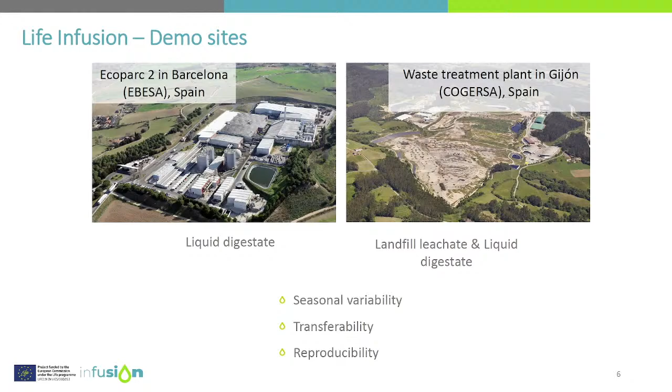Here you have both sites. The first one, Ecoparc 2 in Barcelona. Later, my colleagues will talk a little about the results we have obtained there with liquid digestate. Now we're about to start the piloting in Cogersa, in Gijón, with the landfill leachate.

What we want to see here especially is the seasonal variability of all this process, because of the variability also of what we are getting, the waste. And the transferability, of course, and reproducibility of the solution.

A little bit of the timeline: we started in 2020, first with lab scale optimization of the process, then the adaptation and construction of the pilot plant. We did all the pilot operation in Ecoparc 2 in Barcelona, and demonstration essays with the recovered resources I mentioned before, the biofertilizers and reclaimed water, and also the purge of the bioreactor I will be talking about later. Now we have finalized the pilot installation at the second demo site, and we are starting the operation there.

So here you have a little bit more detail about what we are working on in the project. Here you have a few pictures of all the pilot units.

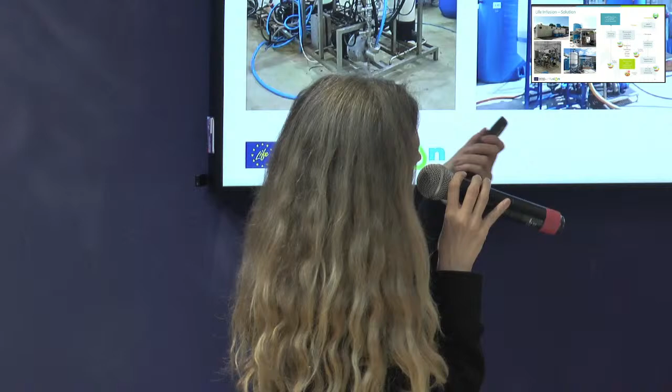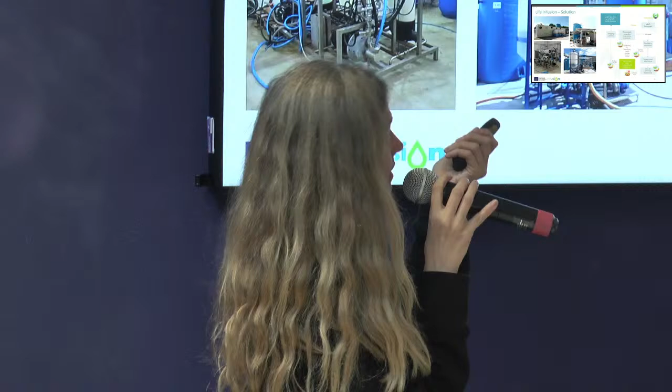What are we doing? This is the main process. We have the leachate or the digestate that I mentioned before. We start with a stripping process to recover some ammonia and also lower the ammonia inside the wastewater to reduce the inhibition in the second step, that is a thermophilic anaerobic membrane bioreactor. In this reactor, we generate biogas, then it's going to be treated with the Abad bioenergy, a technology to upgrade this biogas and produce biomethane.

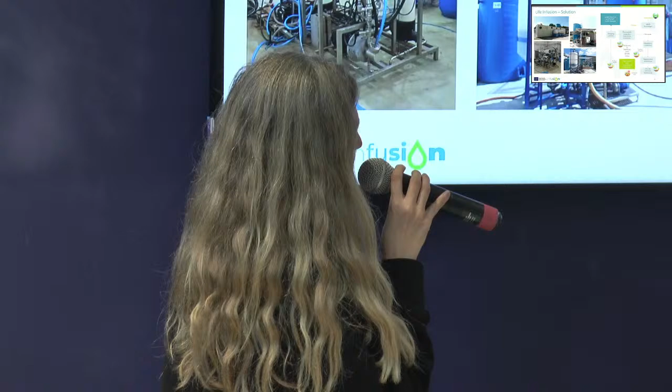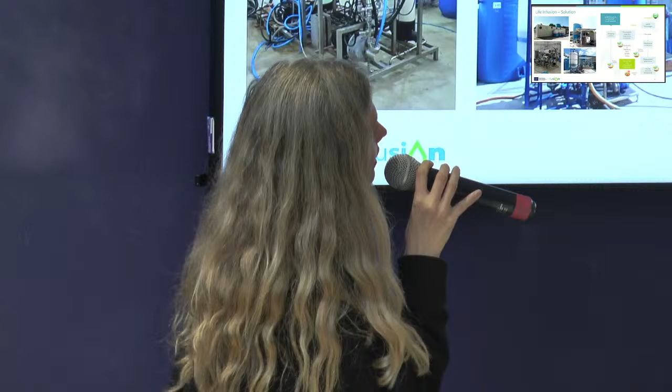And then from the reactor, we get a stabilized purge that can be used as fertilizer, and a permeate from the ultrafiltration membranes. Then we treat it with the membrane contactors to recover the rest of the nitrogen, also as fertilizer, ammonium sulfate. And finally, a step with regenerated reverse osmosis membranes to get really good quality water to be able to use it in agronomical activities.

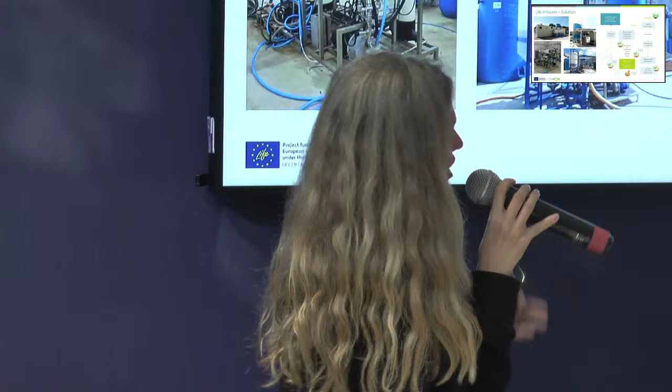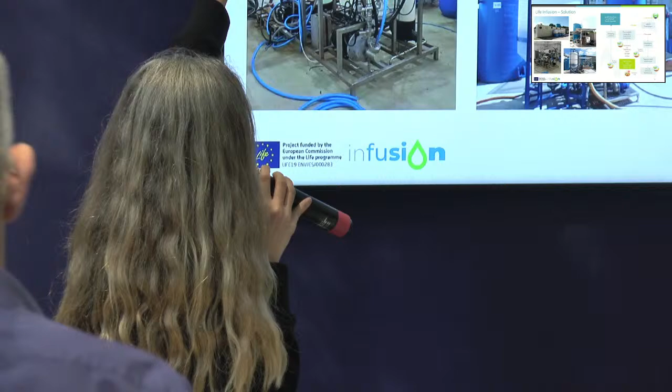So this is the general process we are working on. In here you can see the reactor with the ultrafiltration membranes. This is the stripping unit. Here the reverse osmosis pilot system. And then here a general picture of the membrane contactors. So all these units were first in Barcelona, and now they are installed in Cogersa to start with the second phase of the piloting.

So to end this presentation, a quick review of what Life Infusion is. Just to present to you again the partners. Eurecat, we are coordinating the project, and we did all the lab scale optimization of the process. We have Ecoparc del Besòs, who are doing the first piloting in Barcelona, Cogersa in charge of the second piloting phase in Gijón, Detricon with the stripping technology, Aqualia in charge of all the engineering of the piloting system, IRTA working with the recovered products, seeing how this can be applied, and AMIU Genova and AMB working a lot on dissemination of the results of this project.

So that's it. Thank you for your attention. And I hope you enjoy the following presentations that will be very interesting.

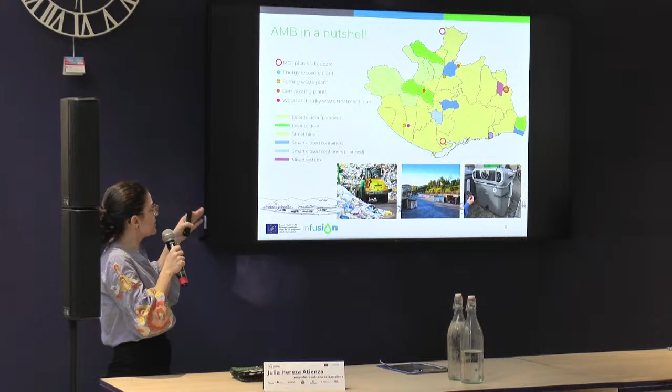As I said before, waste collection is in charge of the municipalities, but the metropolitan area tries to write the roadmap to follow in order to more or less have the same collection system or model. So in our territory, there are different kinds of waste collection systems. We have the more common street bins, but also we have some places with door-to-door collection, and also smart closed bins. But how can we treat or manage all this waste?

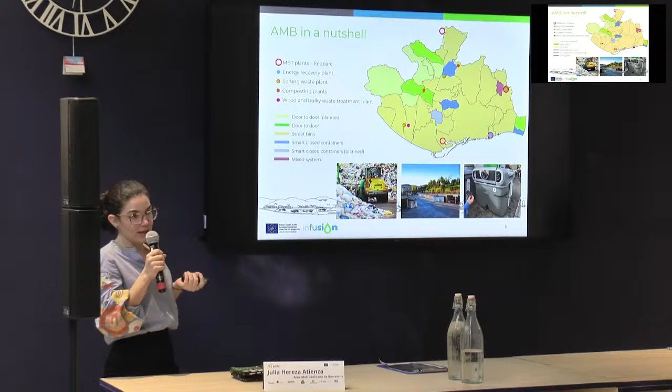So the metropolitan area of Barcelona owns 12 different waste treatment facilities, that includes 4 MBT plants, 4 biological treatment plants that we call ecoparcs. Also, there's 1 energy recovering plant, 3 sorting plants, 2 composting plants, and 1 wood and bulky waste treatment plant.

Moreover, we have also a transfer plant in order to minimize the impact on the environment related to transport, and also to optimize the logistics.

So why we are involved in this project? The metropolitan area of Barcelona, we try always to reduce. Our purpose has always been to reduce all the rejections that we have in our treatment plants, and try to close the loop between waste and resources. That's why we are constantly searching for innovative solutions and systems to try to reduce this rejection. And it is, in fact, in the liquid fraction of the digestion that we find a very nice source of resources.

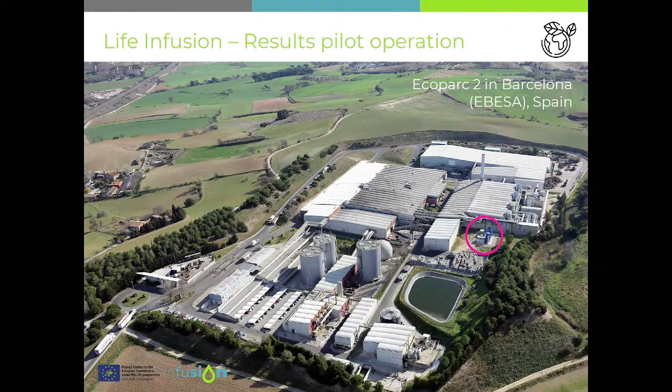So as Caroline said just before, let's go deeper into the results obtained in this first demo site in Ecoparc 2 in Barcelona. There is an aerial picture of this MBT plant, and in the pink circle you can see the pilot plant, the Life Infusion pilot plant. As you can see, it's quite big - a semi-industrial pilot plant.

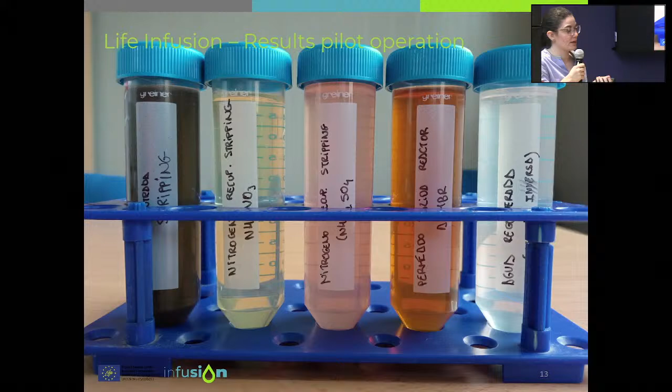So in this system, we start from this effluent that is dense and looks like chocolate. It has a very high concentration of organic matter. And from this effluent, we go to very clear water that can be applied into agriculture and aquaculture.

So going deeper into the results in each part of the process that Caroline mentioned before, we start with the stripping and scrubber unit. Here we tested the system with different temperatures in order to see how temperature impacts nitrogen recovery and removal. We have seen that at temperatures above 45 degrees, we achieve the KPI expected in the project, which is to remove or recover at least more than 50%.

In the anaerobic membrane bioreactor, we also tested using different organic loading rates. We have seen that the higher the organic loading rate, the better the system works, and more chemical oxygen demand can be removed from the effluent.

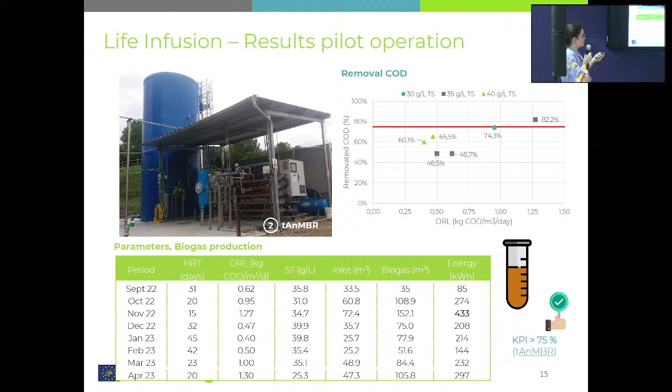Also, there is some relation related to hydraulic retention time and the biogas produced - we can increase biogas production, getting more or less between 1.2 and 3 cubic meters of biogas per cubic meter of wastewater treated.

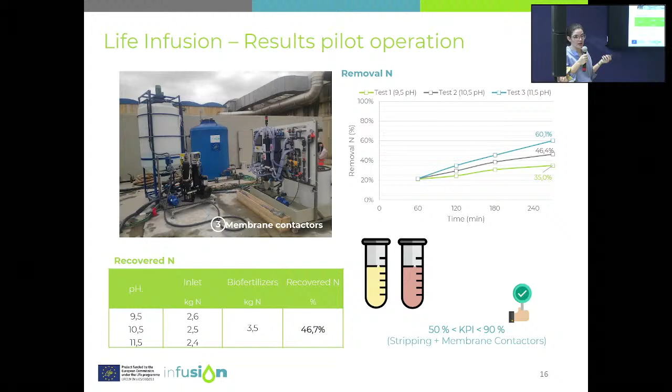So related to the membrane contactors, although this step of the system won't be possible to operate during a long period of time, we have seen that the more basic the pH, the better the system works, and it would be more possible to recover a higher amount of nitrogen.

But in the last step of the process, there's a reverse osmosis membrane where we saw that the more acid the pH, the better the system works. So here there's a conflict - we have to play with the pH, because in one step we need a very basic pH, and in the other the optimal is more acid.

So we are studying the possibility to change and use a stripping and scrubber unit just before the anaerobic membrane bioreactor instead of the membrane contactors.

So in conclusion, around 1.5 million tons of municipal waste is generated in the metropolitan area of Barcelona, and we have to do something to try to reduce the amount of rejections in our MBT plants. The Life Infusion solution tested at Ecoparc 2 allows us to increase the energy obtained, produce different kinds of nutrients and reclaimed water, and the positive results obtained during the project have motivated us to include this solution at a larger scale in our waste treatment plants in the future.

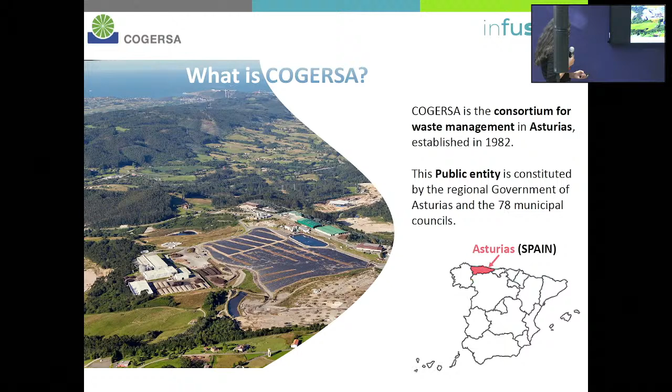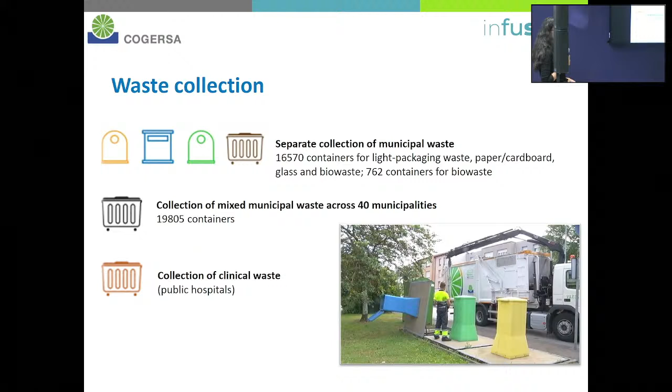The consortium owns the company with the same name, which is a public company that handles the waste operations. We also carry out some of the activities for waste collection, and we differentiate between the types of waste using different colors for our containers.

840,000 tons of waste. Almost half of it is municipal waste, and the next biggest amounts are construction and demolition waste, around 20%, and industrial waste, around 16%. But we also handle waste from hospitals, clinical waste, sewage sludge, and much more.

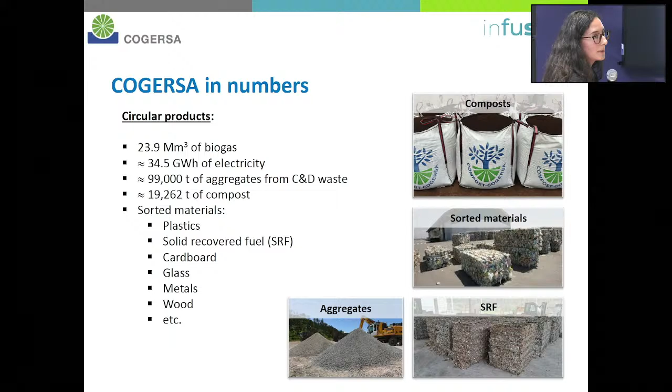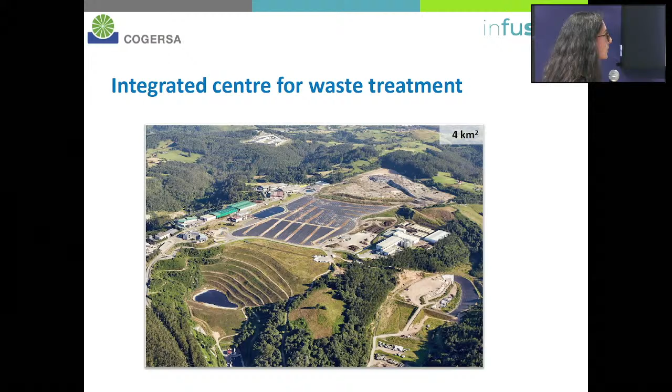We do all of this in an integrated waste treatment center of around 4 square kilometers. Inside, we have 5 sorting plants: one is an MBT plant, the mechanical biological treatment; another for light packaging waste; another for paper and cardboard waste; construction and demolition waste; and waste from electrical and electronic equipment.

We have one anaerobic digestion plant in which we treat the organic matter that is collected through separation at origin. Here we produce biogas, as I said before, and digestate, and this digestate is used also in a compost process. We obtain compost from green waste and manure and from sewage sludge.

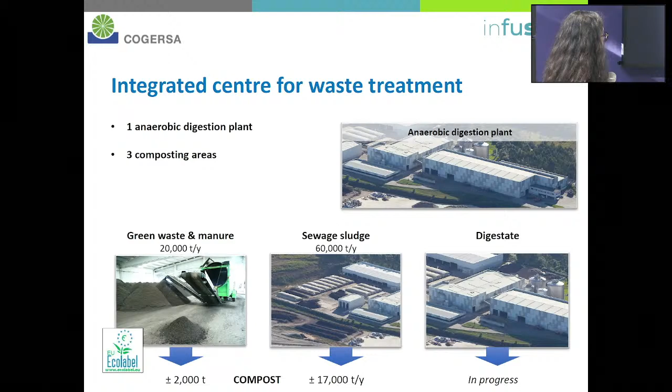We have 3 landfills: one for hazardous waste, another for non-hazardous waste, and the last one for inert waste. We also have one waste-to-energy plant in which we treat mainly the clinical waste, waste from public hospitals mainly.

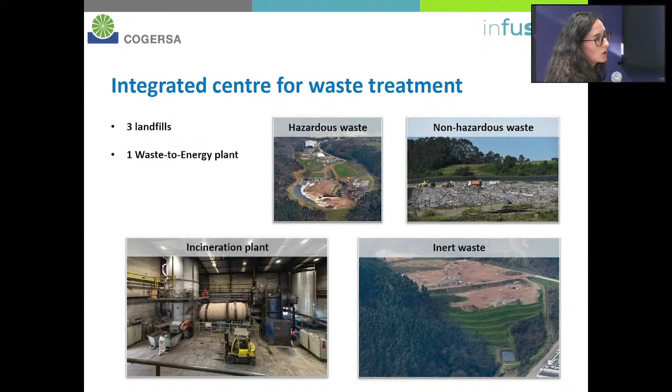We have 4 plants to treat hazardous waste that include physicochemical treatment, solidification and stabilization processes, treatment of mineral oils, and recovery of synthetic oils. And finally, there are other facilities, such as an area for bulky waste or one facility for animal byproducts.

We also have 2 depuration plants for wastewater, a biogas grid, and also a laboratory and an area destined for R&D projects that we call Open Lab.

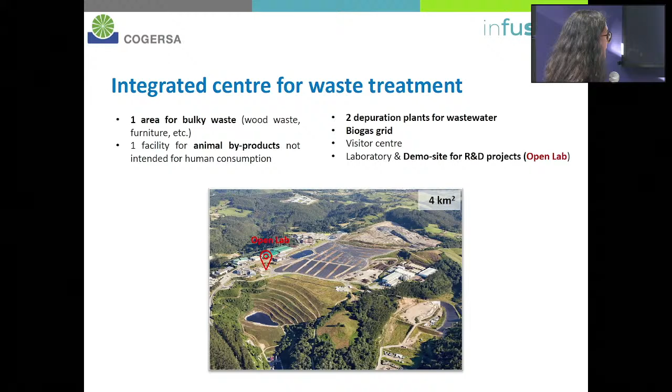The Open Lab, as you can see on the screen, is quite close to the offices, between the offices and the landfill. This is a satellite view of the Open Lab, just to show you that we are creating this space thanks to co-funded projects, and it's also under development.

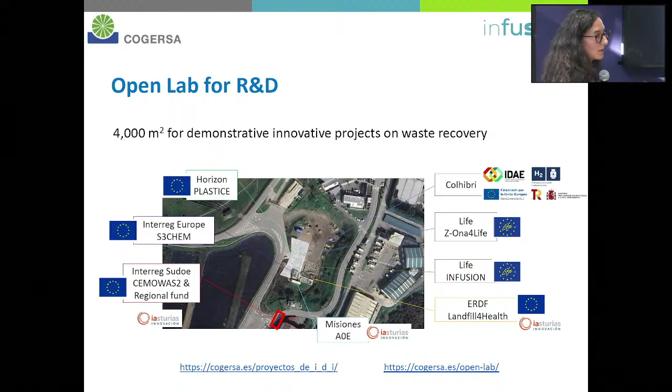One of these projects, of course, is the Life Infusion project that my colleagues have also talked about. The idea is to give intensive treatment to wastewater in order to obtain biomethane, biofertilizers, reclaimed water, and microalgae.

We also have other projects that will allow us to use aluminum salt slag, for instance, to obtain zeolites that can be used for wastewater treatment.

Also, we are involved in another project, a Horizon one, about chemical recycling, in which we are going to use HTL technology, which is hydrothermal liquefaction, to obtain oil from plastic waste. And there are many others, as you can see, because we obtain funding from regional, national, and European projects.

So this is the view, a photograph of the Life Infusion plant, the one that was previously in Eco Park, and that we have nowadays in our center.

Some of this equipment was already tested in Barcelona, such as the anaerobic digestion digester, the ultrafiltration, the membrane contactor, and the stripping unit.

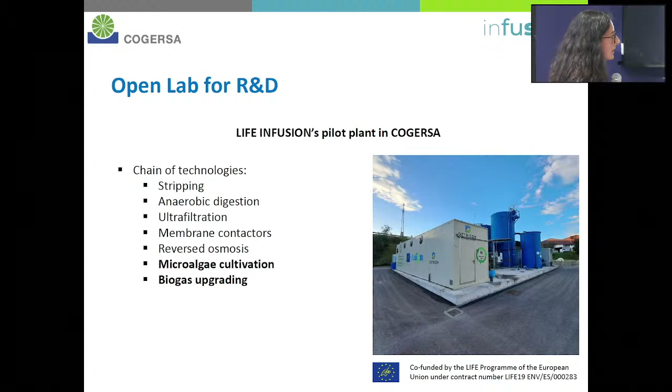But we want to integrate into this chain of technologies the microalgae cultivation plant that we already have in our Open Lab, and also a biogas upgrading unit that is developed by Aqualia.

So the idea is to start treating leachate that we generate in our non-hazardous landfill. And afterwards, we are going to treat the liquid fraction of the digestate, the same that was done already in Barcelona.

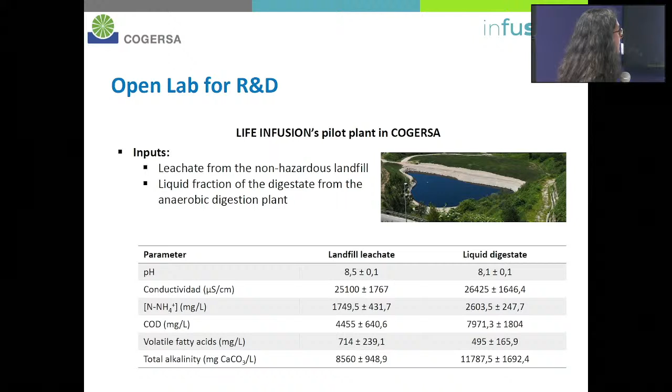So the idea is to obtain different outputs: biofertilizers, in this case ammonium sulfate, biomethane by upgrading the biogas that we obtain, also reclaimed water, and microalgae biomass. This microalgae biomass will be obtained in our microalgae cultivation plant that you can see in this photograph. We are going to use the nutrients present in the wastewater, nitrogen and phosphorus, to grow this microalgae, and also the CO2 produced in the emissions from the incineration plant.

So this is a timeline. We expect to start the plant in a few weeks, hopefully with good results and fast. The idea is to start using the leachate and afterwards the digestate. We have carried out different studies at the university to support this initial operation of the plant. In parallel, we will grow the microalgae, and we are going to study how the consumption of this microalgae will evolve as we change the feedstock.

We are also going to study the compostability of the digestate that we produce, and we are going to carry out some biofertilization assays in another project called NutriGest, focused on the Eucalyptus globulus in Asturias, a tree I'm sure you all know.

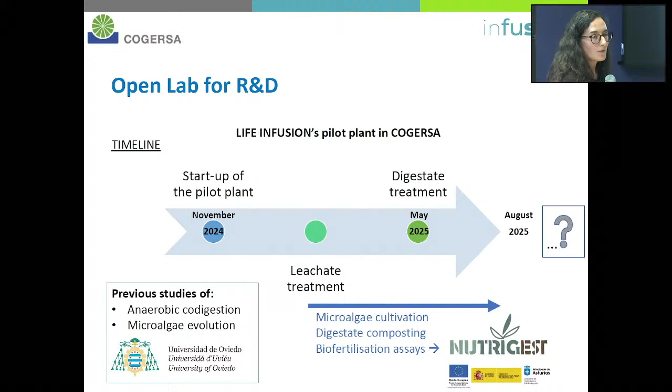We are starting even to include the plant in new proposals. For instance, last September we sent a proposal, a Life proposal, in which we include the use of this plant, for sure, in a different context and with different objectives. But in the end, that's the idea that we have for the Open Lab: to have an open innovation space in which we can try different technologies to valorize our waste, our effluents, and contribute to walking towards a more circular economy.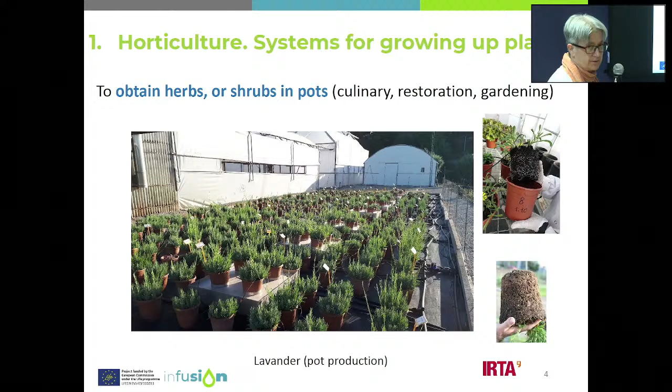So it's quite evident the origin of water for horticulture and agriculture is groundwater and also surface water from rivers. And for fertilizers, normally there's still a massive use of synthetic fertilizers that are chemicals, so we need energy and resources to produce them.

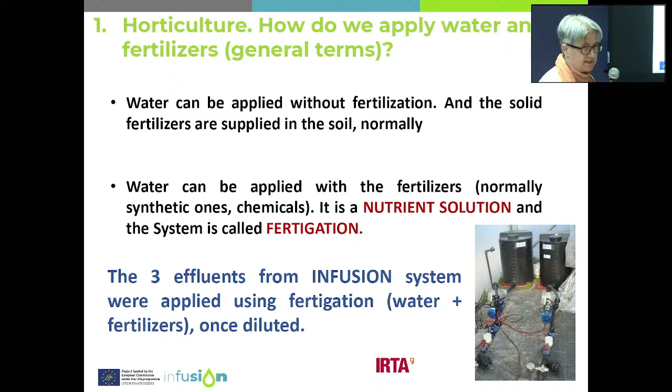How do we apply these inputs? Water can be applied without fertilization, and then the solids, the fertilizers, are applied into the soil. But also water can be applied with the fertilizers, meaning we manufacture a nutrient solution, and the system to apply this nutrient solution is called fertigation. So the effluents get into the infusion system and we apply it as a fertigation system, applying both water and fertilizers.

So there is a very important challenge: the replacement of synthetic chemical fertilizers with byproducts, for the reasons I told you before. Another issue is water scarcity in our Mediterranean region, particularly in Catalonia. We had like 4 or 5 years of deep drought.

So the objective here of IRTA in this project was mainly to conduct experiments to test new circular horticultural systems using effluents from the infusion systems as a nutrient solution.

So what is actually a nutrient solution? We need to manufacture it with water. We should dilute nitrogen into forms of nitrate and ammonium, and also add potassium, phosphorus, and calcium. Normally these are already present in our waters. And we want water low in sodium and chloride.

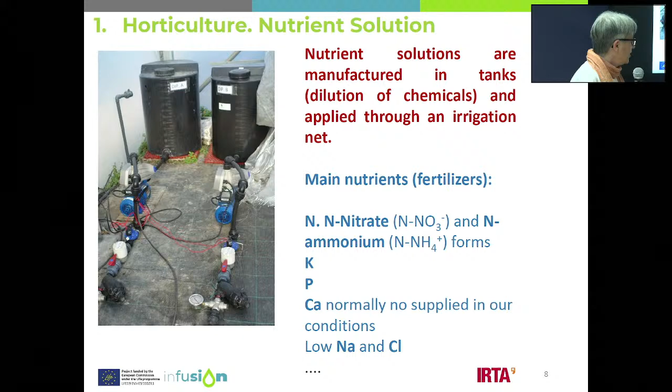Of course, the well water, the original water in which we dilute the nutrients, is normally very low in nutrients, and this is the reason why we add chemicals to increase the proportion of these nutrients.

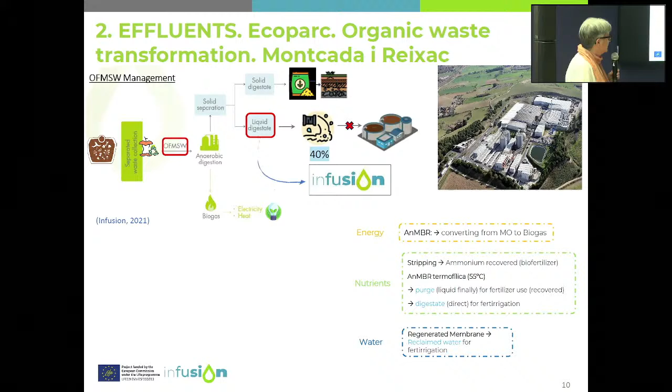So this is the scheme we have been discussing in other presentations, and we try to use basically 3 effluents from the system. The first is the digestate that comes from the bioreactor. The second is a concentrate, also called purge, from ultrafiltration. And the third is the reclaimed water obtained after several processes, including ultrafiltration and reverse osmosis.

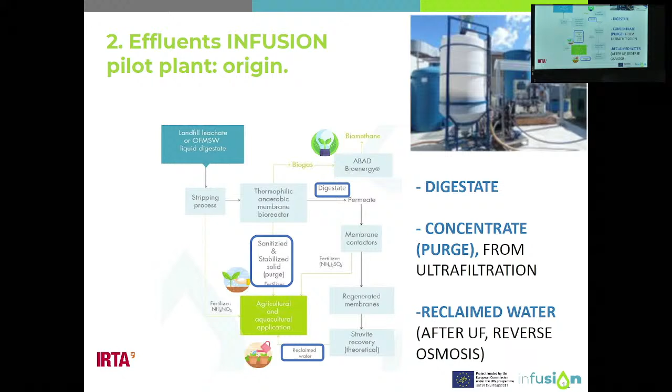So we are going to focus on the agronomic use of these 3 products. What should we do if we want to use such products, such effluents? First, we have to characterize the product's composition. Then check the feasibility of direct use, if possible. It's not easy, but it can be possible.

Then, if needed, we have to adapt the composition of this solution to the nutrient solution needed. Another possibility, not excluded from the others, is to use selected plants that can be more tolerant, for example, to some parameters.

What kind of situations can occur? First, as in this case with life infusion effluents, we can find high salinity in our effluents. In this case we have to dilute with well or surface water. We can also have an inappropriate pH—normally these products have a high pH, so we have to add an acid.

Another option is to add nutrients to the effluents if needed. And the last option I mention here is to limit the use of the solution if it is too concentrated.

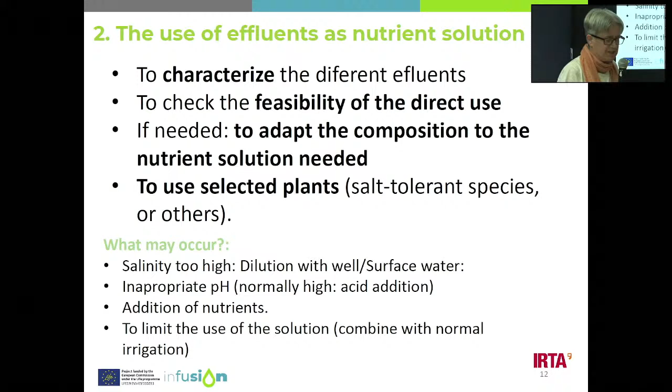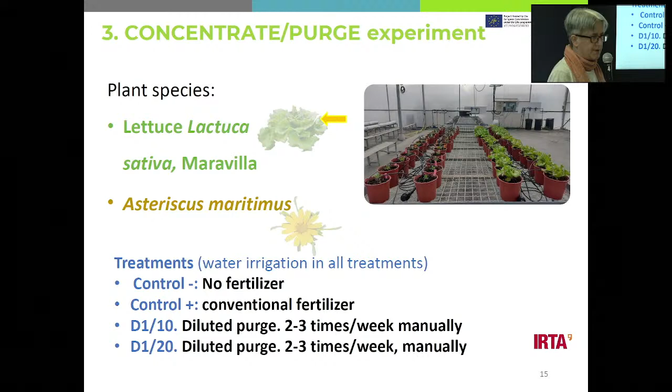In addition, when we manufactured these dilutions, we kept the products in a refrigerator because we wanted to avoid other processes inside the products, for example nitrification - we wanted to keep the liquids in good conditions.

And we measured, during the whole period of growing the plants, different key parameters: pH, EC, nitrates, and ammonium.

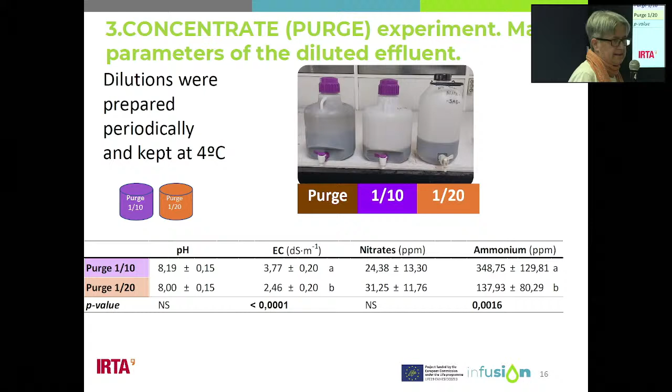You've noticed that we have not added acid to the solution - instead the pH is high. Normally plants want a pH like 6.5, more or less. This is because we expect that the substrates can make a certain lowering of this pH.

A buffering effect also. This is a view of the experiment with 4 treatments. Remember that the application was manual, and not every time we were watering was it applied - we added just water in some irrigation events.

And we are going to see just the results for lettuce, a short view. We achieved, of course, that if we have a control negative, the plants really don't grow, because we chose a substrate with low fertility, meaning plants don't have any nutrients for growing. So we have a very low growth of the plants - this was for checking that we were using an appropriate substrate.

Then you can see that control positive grew more than the other treatments, our diluted effluent treatments. And for Asteriscus, the other species, we had better results with the more concentrated solution. So we concluded that there was still room for applying more product.

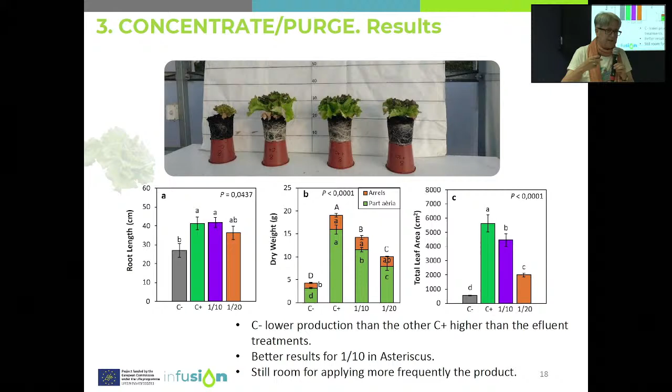This is the reason why we scheduled another experiment. If you remember, the composition of the digestate and the concentrate was quite similar in general terms. So we had digestate available for doing the experiments, and we made two more experiments, for lettuce and for another ornamental species, Limoniastrum monopetalum.

Again, the kind of experiment was the same: control negative, control positive. Then we applied a solution with digestate at 150 ppm of ammonium, and another one with half of this concentration. In this case, the product was kept inside the greenhouse, so we didn't keep it in a refrigerator - it was in normal field conditions. And we applied the products continuously, so with the irrigation network, this product was applied all the time.

In a second experiment, we checked double the concentration. This table shows the concentration, the properties, in the 2 trials of the different solutions - just remember that we were working in real conditions.

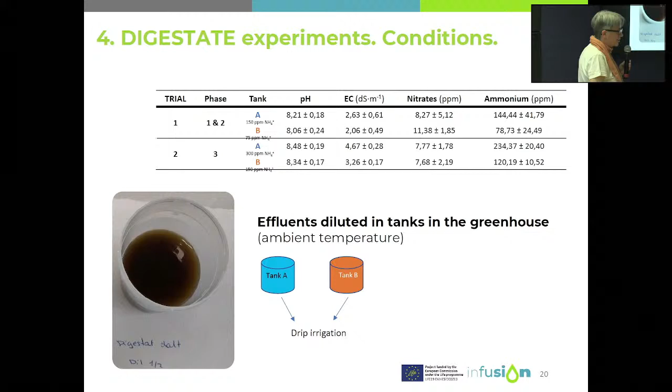This is a view of this second experiment with digestate, which comprises two different experiments, particularly with lettuce. And these are the results in this case: in the first trial, we achieved equal growth between the control positive and our treatments.

This was achieved, but the results were quite low. In the second one, where we increased the concentration of ammonia, we achieved higher performance, higher growth of the lettuce, and it was clearly different from the negative control. So we found that we had a positive response when ammonium concentration was increased.

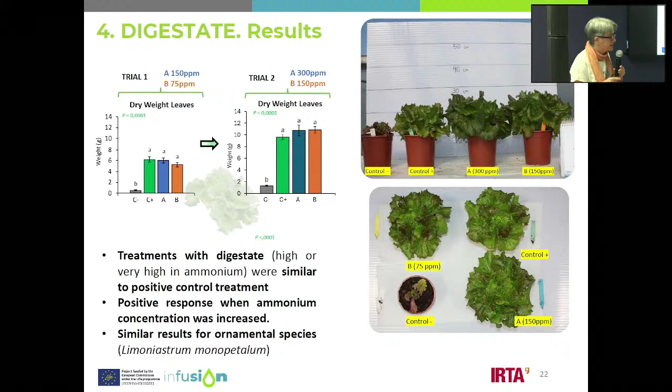And similar results were obtained for Limoniastrum. So, till here, the first two effluents, and then Carmen will continue with the other one. Thank you.

Okay, I'm Carmen Biel, and I want to explain the third effluent that we use, the reclaimed water, and we made essays with tomatoes.

As Rafi explained, we have reclaimed water that has an electrical conductivity value of 10, but we need to decrease this value, and also decrease the ammonium content for use in irrigation.

So we decided to mix the reclaimed water with well water from our facilities in different proportions, to try to decrease the electrical conductivity and the ammonium content.

If we mix 25% reclaimed water with well water, we achieve these values of electrical conductivity and ammonium. This is the process.

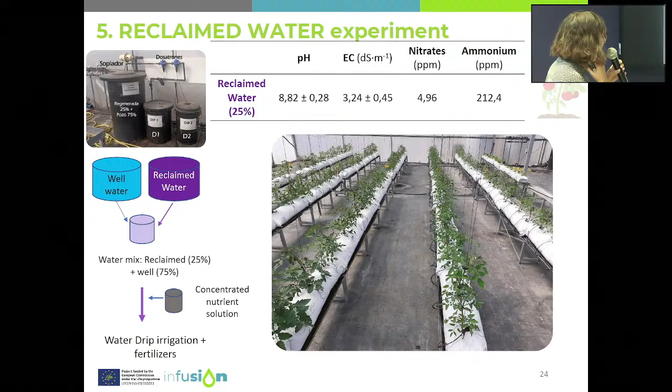This is a view of the experiment with plastic bags filled with perlite as a substrate.

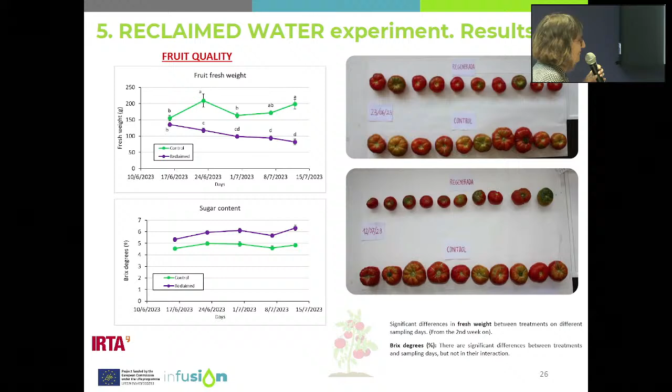We also measured the quality of the fruits, the size and the weight of individual fruits. With reclaimed water irrigation, the size of the tomatoes decreased - this is an accumulative effect of the salinity. We also found higher sugar content, which can be good for this quality parameter - more sugars, more taste, but less production.

The conclusions of all the agronomic essays we explained is that it's possible to use these effluents to irrigate or fertirrigate crops, at least in our Mediterranean environmental conditions, because we showed in the tanks that we accumulated these products - it's a dynamic process, and we saw that the ammonium is transferred to nitrates, which is good news.

But we have to think about how to treat this effluent more. We have to remove the solids, adjust the nutrient composition, and if we want to use these products for horticulture crops consumed fresh, we have to hygienize these products. But the main result is that we can use this.

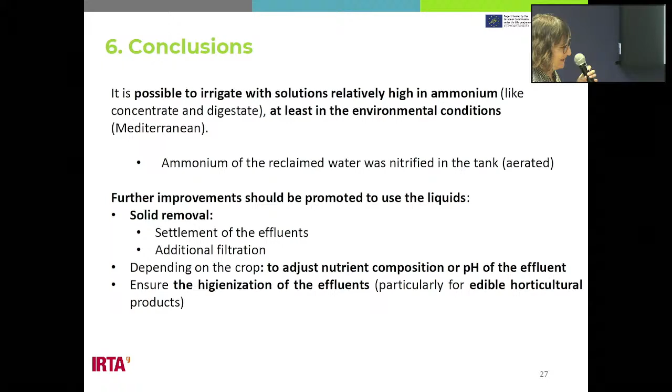One question we want to think about is implementing these treatments - one possibility is to promote the installation of gardens or nurseries near the eco-parks or the plants where we obtain these products, to grow ornamental plants for the same eco-park or for the public parks of the city. That is our main result.

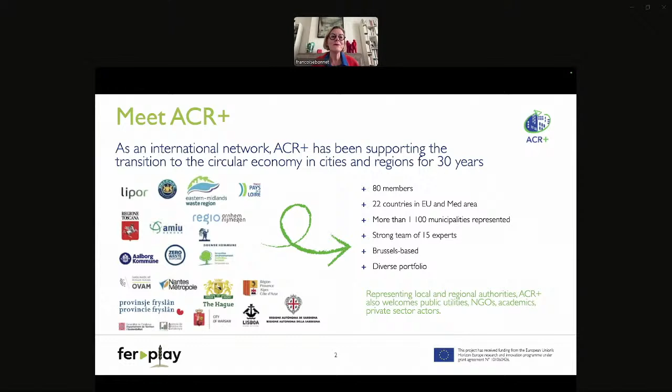ACR Plus, as mentioned before, is a network existing for 30 years, and we try to help public authorities, decentralized authorities, move towards more circularity in their public policy. We have a lot of different kinds of members in different countries, and one of our services to members is to implement or test pilot projects on specific areas.

One thing I would like to emphasize is that ACR Plus was born because we thought it was really important, already 30 years ago, to decrease the production of waste, and that the best waste is the one that does not exist. So we really push a lot for prevention.

But of course, we all know, especially at municipal level with municipal waste management, that even if we have a strong prevention policy, we still have a lot of quantities of waste to deal with. And you are better than me on that, because I'm not a technician, but the organic waste fraction is not an easy fraction to deal with. Especially when you put it in the landfill, you really want to have less quantity of bio waste in your landfill plant.

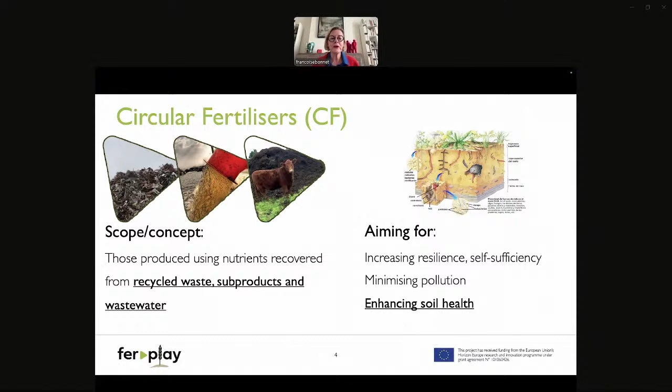So now, directly to the project: the idea is really to increase the use of circular fertilizers by minimizing pollution at the beginning, and to promote their use in order to increase soil health and have less use of chemical fertilizers. So we try with this project to promote circular fertilizers through recycled waste, subproducts, and wastewater.

So the idea is to revert, to reduce, to avoid. With this project, we also want to create the good conditions to promote these fertilizers. And we know that not only public authorities should be conscious about the good use of this kind of fertilizer, but we really need to promote the value chain involved, and so all the stakeholders, the actors being part of this value chain.

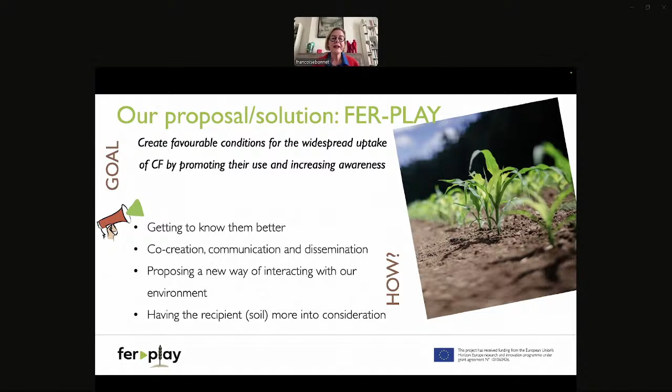The different goals of this project were to get to know better those actors, to create together this value chain and the communication and dissemination, in order to be able to really tackle issues and benefits, and to tailor solutions to everybody - all the actors of the value chain - and also to propose new ways to interact together, and of course to raise public awareness about the need to take care of our soil in general.

The first step was to map and select alternative fertilizer value chains, and I will show you in the next slides which ones, assess the impact of selected value chains, and disseminate about them. And at the end is to have deliverables with recommendations and good practices in order to raise awareness about those circular fertilizers.

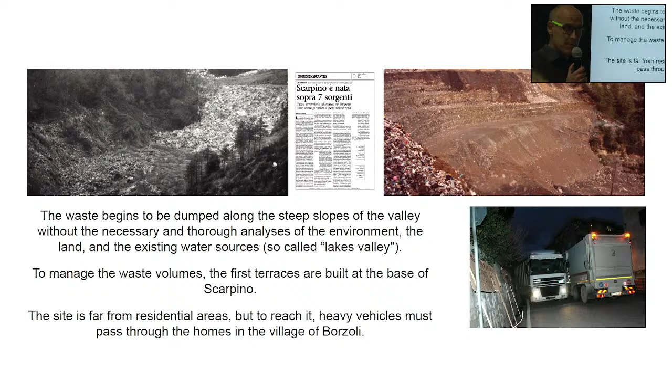First of all, I want to spend a few words about the past. The old landfill was built in 1968 on the hills around Genova, in a period when there was no environmental regulation. And that's the result: there was uncontrolled disposal of waste, as you can see on the picture on the left, and many problems immediately became known. The most important, as you can imagine, was the leachate problem, because the valley where the old landfill was built was named Lakes Valley.

Things have changed through the years, and this is the situation many years later, when regulations became more environmentally oriented.

But now we want to have a look at the situation today. This is the site, and I want to show you what you have seen this morning, the plants you have visited: I think the biogas plant, the TMB which is under construction, the photovoltaic field, and the leachate treatment. In the following slides, I'm going to focus more on these plants.

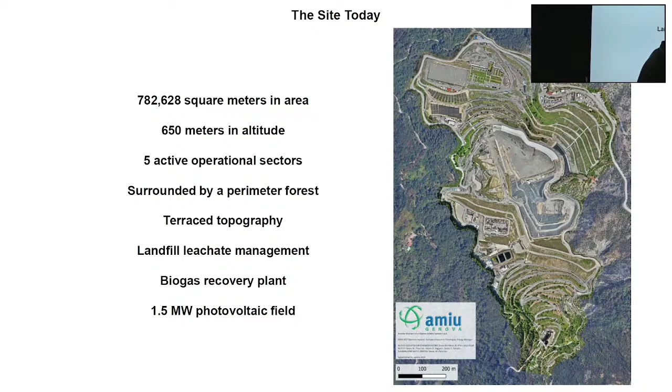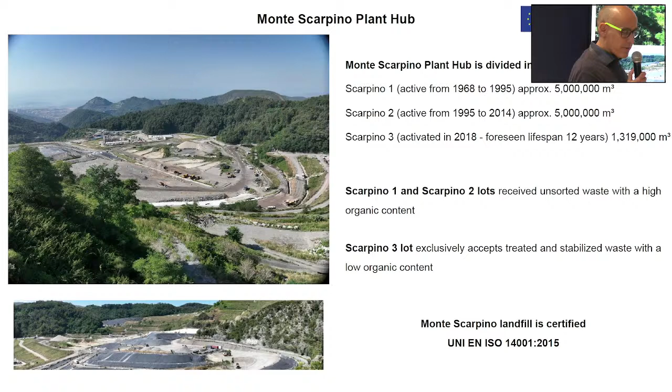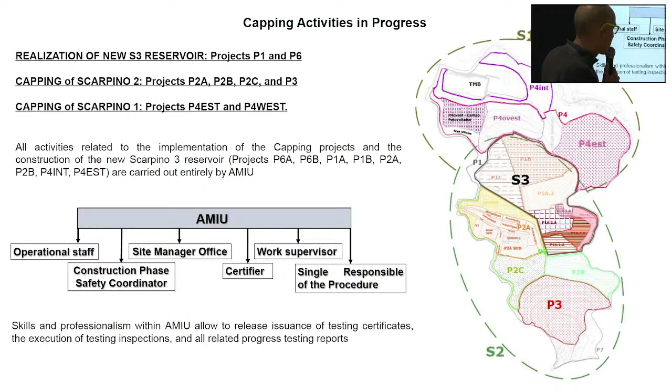I want to draw attention to what the company is doing at the moment: a great technical effort to cap all the old landfills. To cap means to separate the waste from the environment. This great effort is carried out completely by the AMIU team. All the roles are covered by AMIU workers, such as operational staff, certifier, work supervisor, and so on. Here in this picture, you can see some examples of what we are doing.

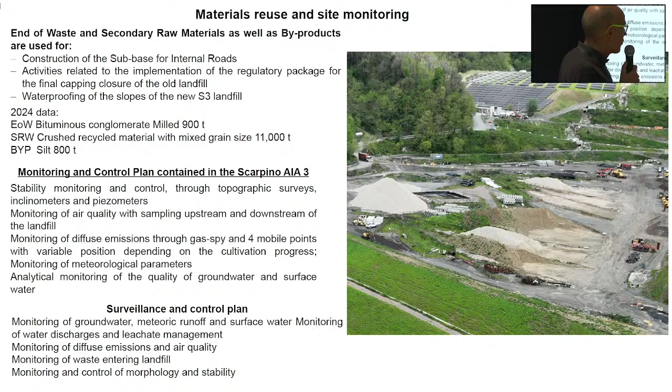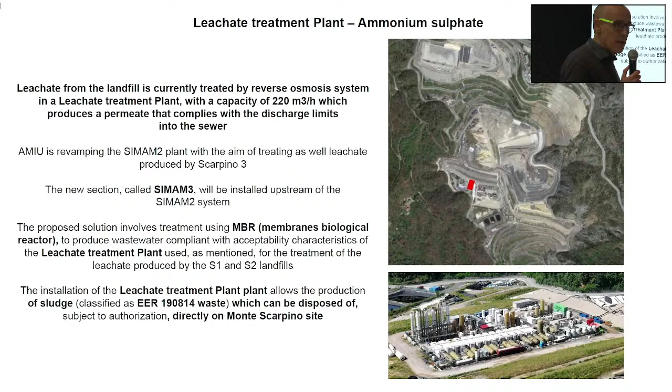This is a slide that shows the leachate treatment plant. I think you visited it in the morning, but I think it's necessary to say more about it. It is based on reverse osmosis, and it has a capacity of 220 cubic meters per hour.

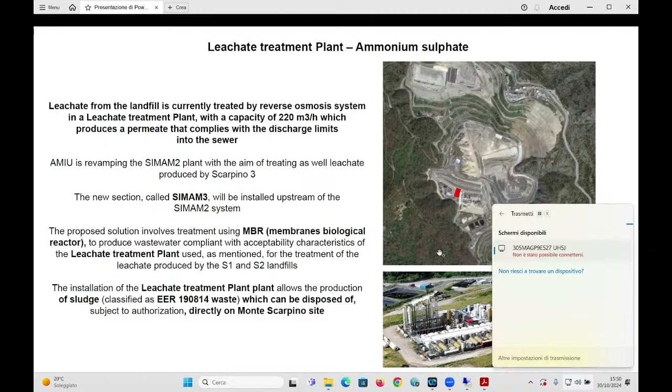So... Okay, there is a little technical problem with the connection from the TV. We are not lucky. That's a pity because we have many beautiful images to show, above all when we are going to talk about the future.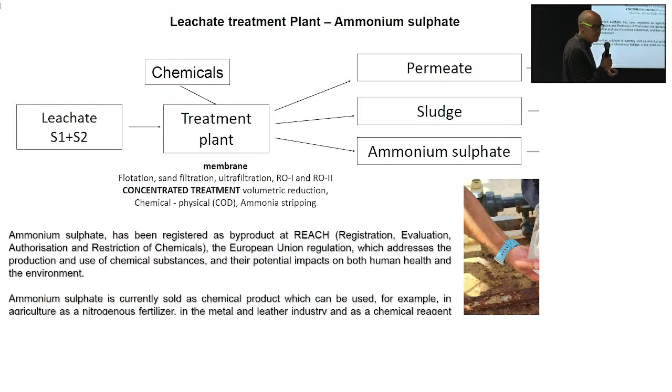The other output, very important, is water. It's obviously important why: we had two years of severe drought, so it's important to store water. I'm talking about industrial water, which can be used on site for firefighting and track wetting—many important uses for the landfill, and for the site too.

Let's change plant. We are talking about the biomethane plant. This has been the first biomethane production plant from landfill gas on an industrial scale. It was built in 2020, at the end of 2020, and it has a capacity of 1,500 cubic meters per hour.

As output, we have biomethane, which, as you probably know, is a renewable fuel that can be used for many purposes, such as fuel for transport and to produce electricity and heat.

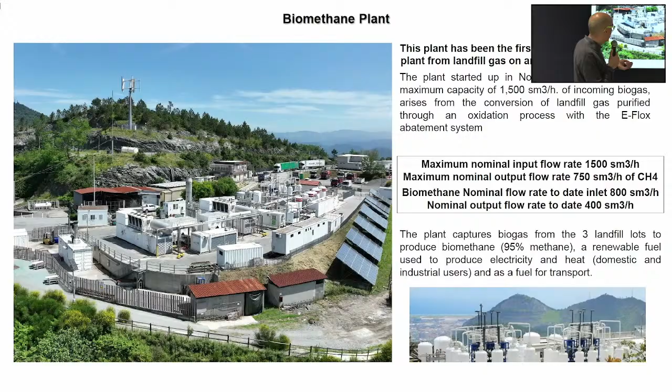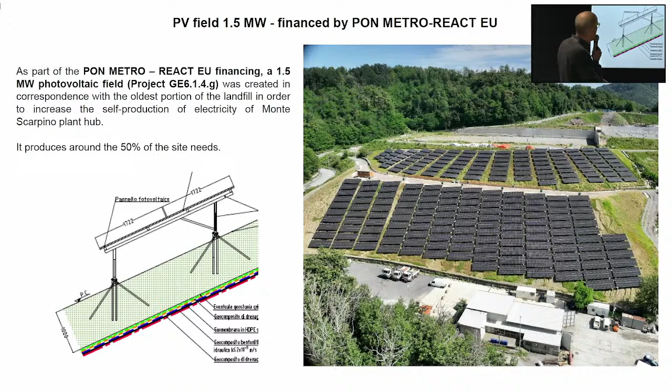It is financed by PON METRO-REACT EU. We finished it last year. It is very important, and I think it's quite beautiful because it characterizes the site. And obviously, for the self-production of electricity, it produces around 50% of the site's needs.

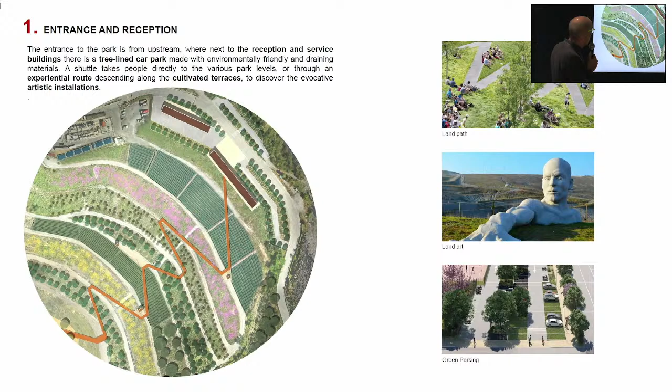The first sector is the entrance and reception, where there will be service buildings and a tree-lined car park where people can leave their cars. They can choose if they want to go by car with electrical vehicles, or if they want to go on foot following the orange line, going through a land path, land art, and cultivated terraces in a beautiful scenario.

The BioLake, a new idea. The BioLake is divided into areas with deep water for swimming, for taking sun, for just relaxing, with solarium, shaded spaces, and tree-lined areas. And with shallow water, where we think we can plant aquatic and submerged plants to carry out phytopurifying and oxygenating actions.

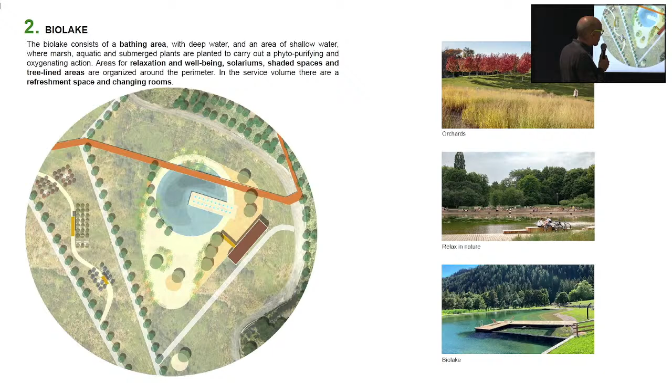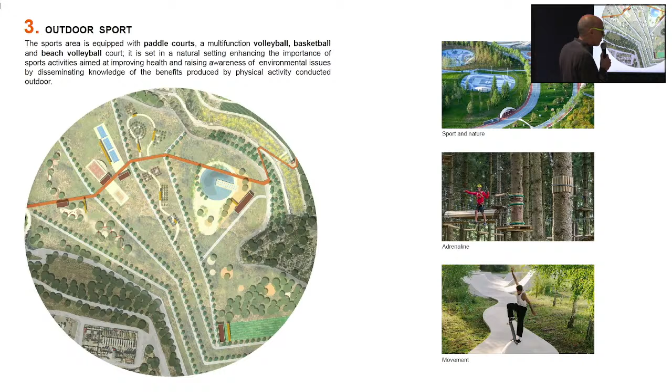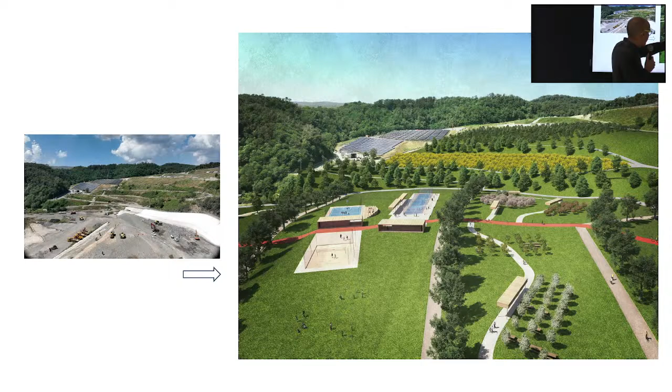Third sector is outdoor sport, a sort of village for sports, with pitches for volleyball, for basketball, paddle, and so on. In this picture, you can watch better the sport village situation today.

Number 4, green mindfulness, a place where people can just relax in nature with a strong contact with nature itself, where people can have meditation, landscape observation, beautiful scenario. You are between sea and sky, and so people can just relax, read a book, and so on.

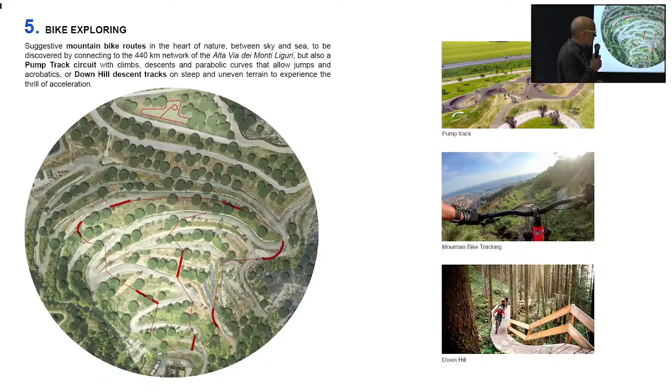And the last speech for today, titled Sustainability of Circular Economy, a Scientific Approach, a Long Process Life Cycle. She's a Vice Chancellor for Sustainability of the University of Genoa. Welcome to Adriana Del Borghi.

So thank you very much for inviting us to conclude this very interesting day. It's a pleasure to me, as I already also worked with Amio, so I'm very happy to be here. I would like just to spend a couple of words, I know you're all tired, concerning some aspects which I would like to focus on, concerning circularity.

We are always used to think about circular economy as just an issue of managing waste and just closing the loops. But of course, we all know that circular economy is a matter of business and is a business model. So we'll have to include and consider all the issues related to the design of circularity, starting from the early phases of design.

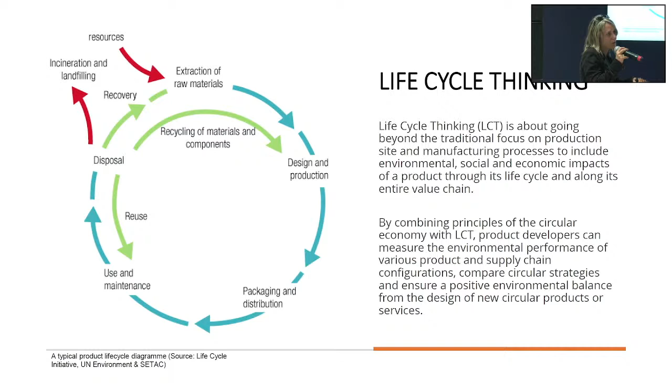Sometimes, as we encountered in a project where we were asked to perform life cycle assessment on the whole life cycle, the leaching phase with acid chemicals is very impactful, considering we'll have to produce acid to extract fertilizers if we perform acid leaching. This is just an example showing we have to consider all the issues related to the life cycle if we want to be sure we are not just shifting burdens from one phase to another.

A life cycle assessment is a well-known tool used to perform a quantitative approach. This calculation follows a standardized procedure based on ISO standards. My favorite goal of life cycle assessment comes down to three points: we have to be sure we are not moving impacts from one phase to another, to other substances, to other regions or continents, and to the future.

In particular, when we talk about landfill, we have to include time in our calculation. So this is the approach. It's a very interesting one, not just at research level but also at a very high application level now.

The way to combine circularity index with life cycle assessment indicators and results lets us take from the circular economy approach the inspiring vision of minimizing environmental impacts towards circularity, but of course we have to couple this approach with the life cycle approach—coupling accountability to circularity.

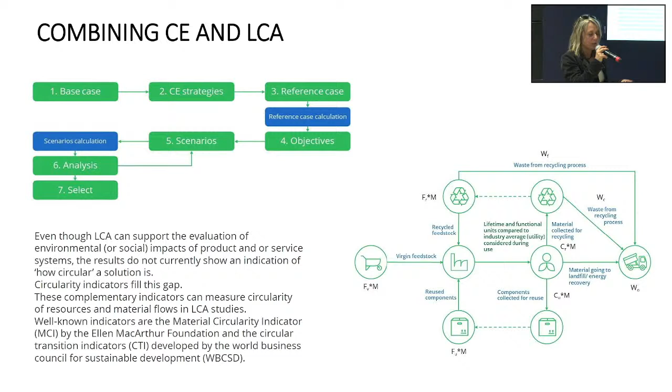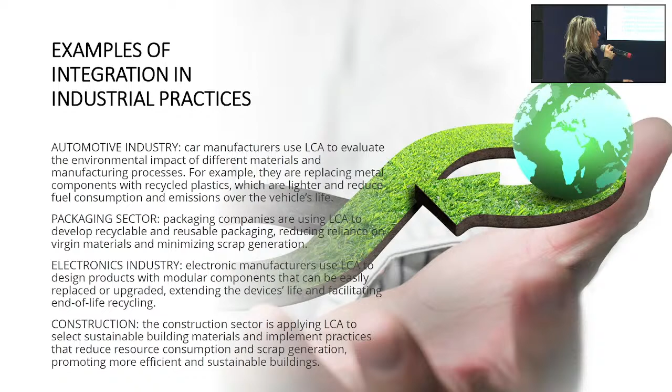In that project, we also decided to calculate not just environmental impact, but also the social impact of circularity. This is another very interesting issue that had to be included in this approach. Future perspectives include the inclusion of all aspects when we have good ideas and the inspiring vision to close the loops, but also with an accountability that helps complete our calculations without shifting impacts from one phase to another.